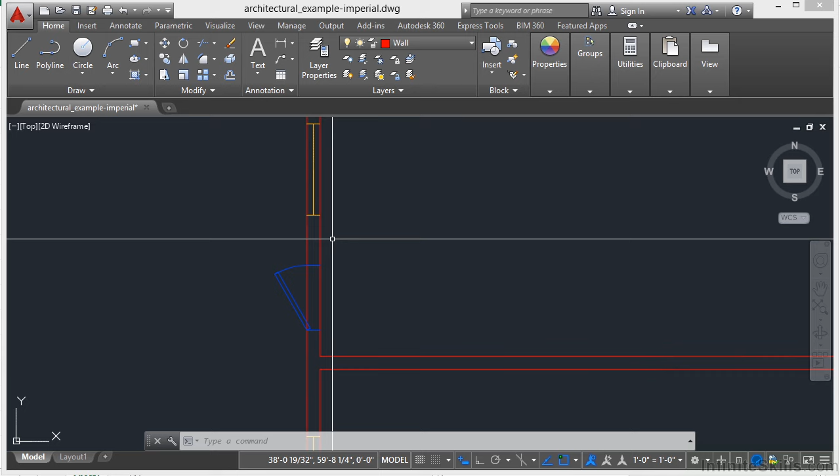For example, you can put construction lines, text, dimensions, and title blocks on separate layers each. In this file, we have a layer for the walls, a layer for the windows, and a layer for the doors. You can see they're all different colors here. That's just there to help you distinguish between the line work so you can know what is what.

These are the layers here. They control the line type and the color of our objects. By creating layers, you can associate similar types of objects by assigning them to the same layer, as was done in this example. With layers, you can then control the following.

You can control whether objects on a layer are visible in any viewport. You can control whether and how objects are printed. You can control what color is assigned to all of the objects on a layer. You can control what default line type and line weight are assigned to all of the objects on that layer.

You can also control whether objects on a layer can be modified. You can lock down your line work that way. You can also control whether objects display with different layer properties in individual layout viewports.

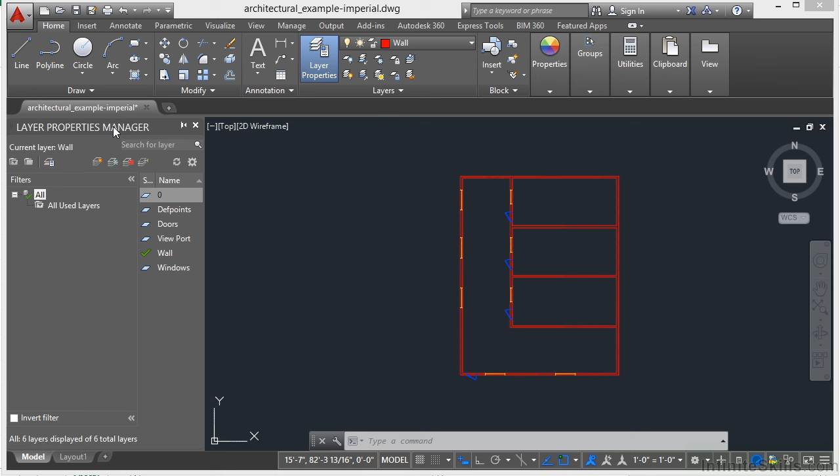Now, a few basic things about layers. Every drawing includes a layer named 0. If I open up the Layer Properties Manager, I click on this button right here, or I can type in LA on the command line. The Layer Properties Manager is a palette, so you can move it around and do things with it, just like any other palette. Every drawing has a layer named 0, just like this one right here.

Layer 0 cannot be deleted or renamed. This layer has two purposes in a file. One, it ensures that every drawing includes at least one layer. And two, it provides a special layer that relates to controlling colors and blocks. We'll talk about that at another time.

I recommend that you create several new layers with which to organize your drawing, rather than create your entire drawing on layer 0. I've seen that. That's not good CAD practices. In this architectural example drawing, we have a few different layers in them, and we've gone over them.

So here in our Layer Manager, you can get to a lot of different tools for creating and managing your layers. We'll talk about the Layer Manager in depth later on. But here is the Layer panel for your ribbon. You'll get to a lot of different controls from it here.

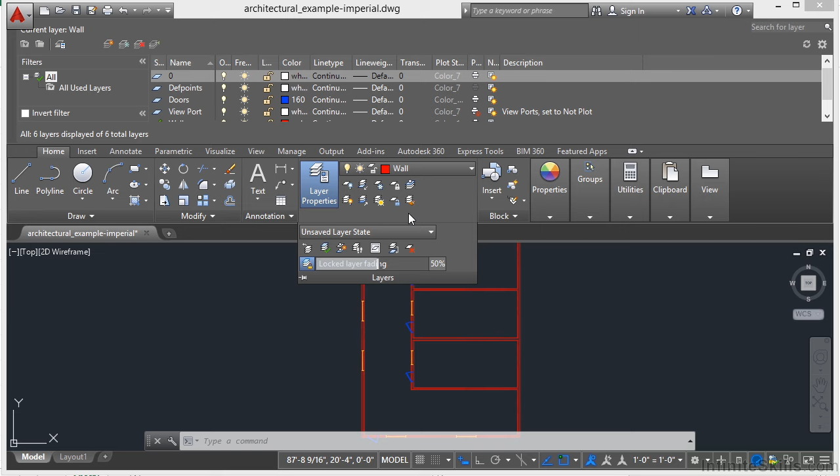If you click this Layer Properties button, that will open or close the Layer Manager. If you select on this bar here, you will get to the different layers in your file. If you select on one, it will become the current layer. Whatever layer is current, that's what your new objects will be drawn on.

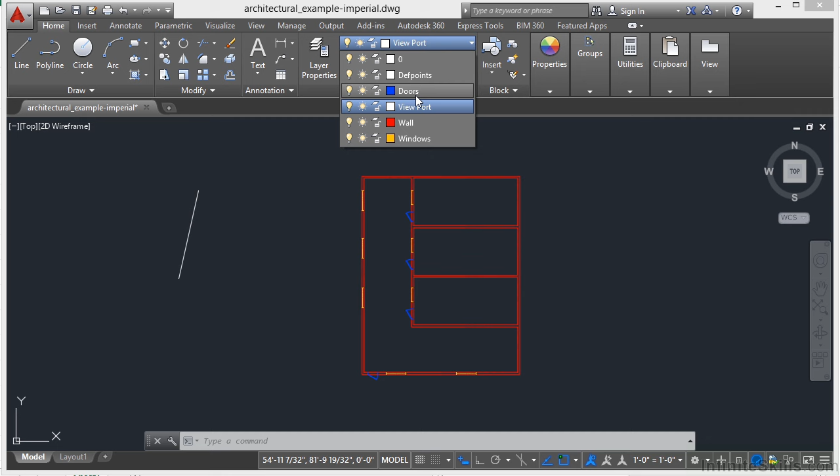So this object was just drawn on the viewport layer. You can switch to the doors layer. And now when I draw an object, it's blue because it's on the doors layer.

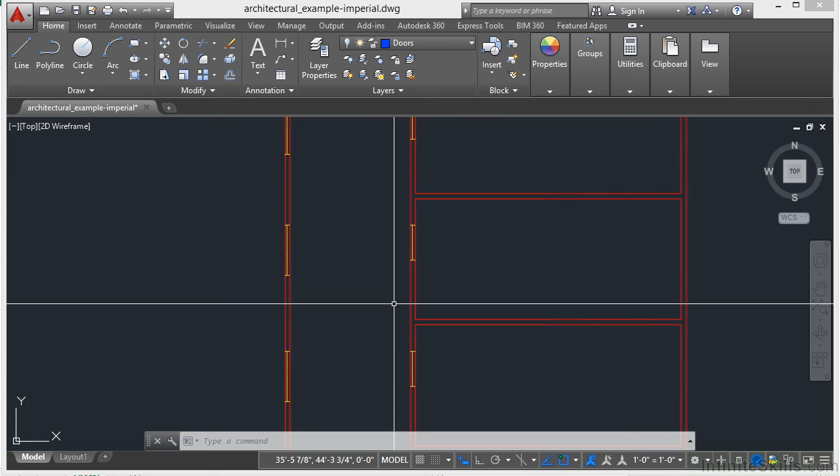I have different buttons here. I can isolate my different objects and freeze some of my layers. So if I click the freeze button, I can freeze all of the doors. Now they're still in my file, they're just sort of off. I can't see them, that way I won't accidentally delete them or manipulate them, and it gets them out of the way. I can turn them back on by clicking on the Turn All Layers Back On button here.

So this is off, and then this is freeze. We'll talk a little bit more about the differences between turning off a layer and freezing a layer more in depth. But you can do that to help you work with your line work while other objects are out of the way. That way you won't accidentally delete or modify them, and it makes things easier when there's less on your screen.

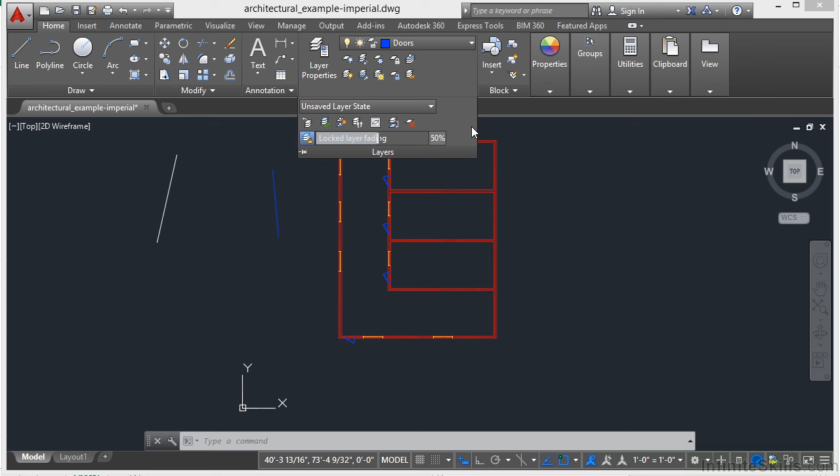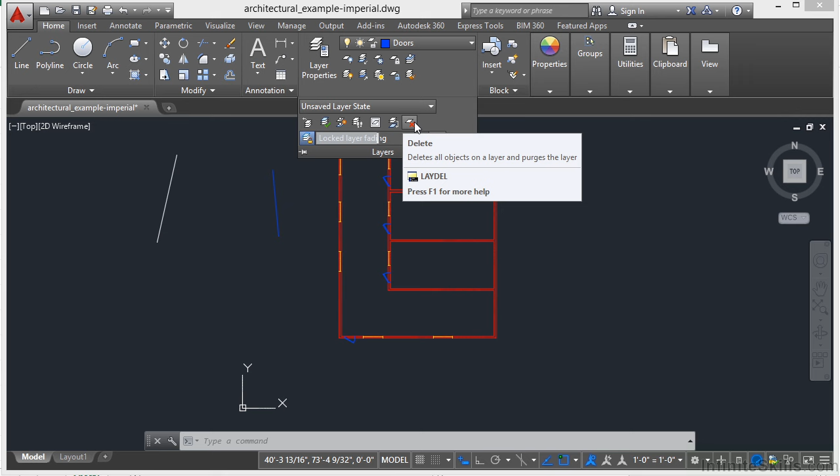This little button here, the triangle, brings down some other settings that are a little bit more advanced. You can copy objects to a new layer. You can do the layer walk, which will display your objects on specific layers for you. You can freeze layers. You can merge layers so that you move all the objects from one layer to another and it gets rid of that layer for you. It helps you clean up your drawing. And this will delete all the objects on a specific layer.